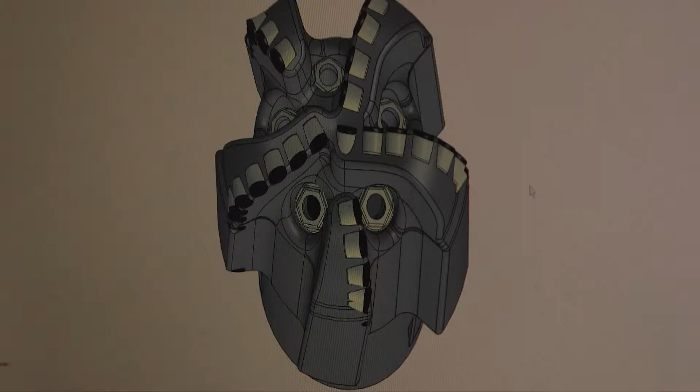For over 60 years, Taurex drill bits have been used in drilling operations all over the world. Like most products in the industry, the process starts in engineering. The bit designs are created by the engineering team with a combination of a proprietary drill bit performance software and industry-standard CAD software. Each model, whether it's a matrix bit or a steel bit, is done by our engineering group, and we can do either one at any time.

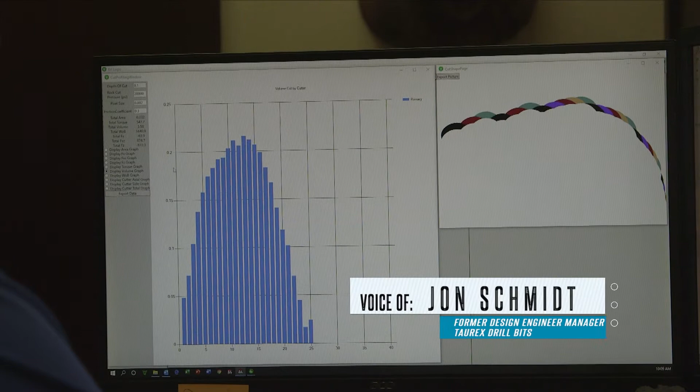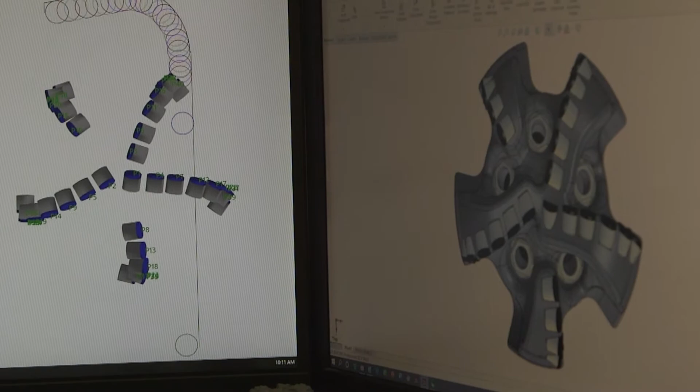These are parameters for laying our cutters out on our drill bits. We use this in coordination with our 3D CAD software to lay our bits out and lay our cutters out based on the volume of rock cut by each cutter, the cut profile of our cutters, as well as the area that each cutter cuts per revolution on a drill bit. We use this in conjunction with CAD software to create our models. And once it's completed with us in design, we send it to manufacturing.

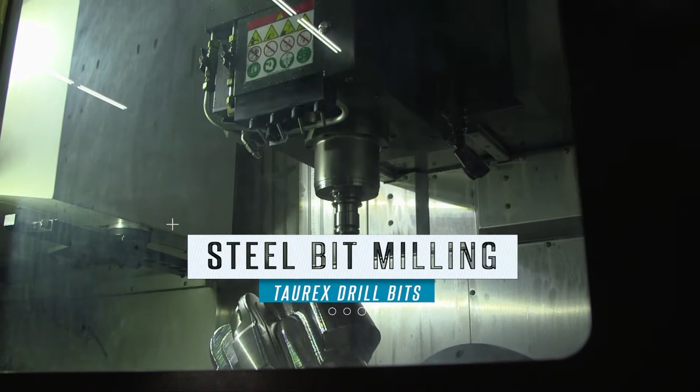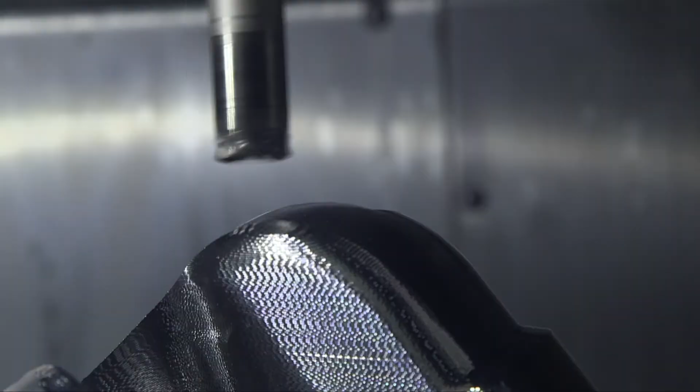We join the manufacturing process for the steel bits with the mill operation. Depending on the size of the bit, the number of blades, and all of the features that the bits will have on them, that'll take anywhere from 6 to 8 hours up to 40 hours to complete one bit. This particular bit probably will be in the machine for about 24 hours.

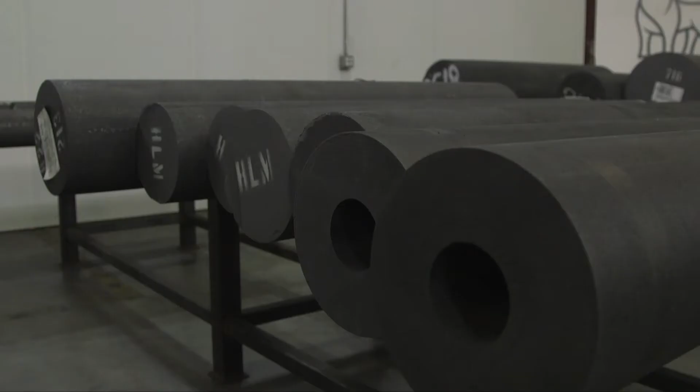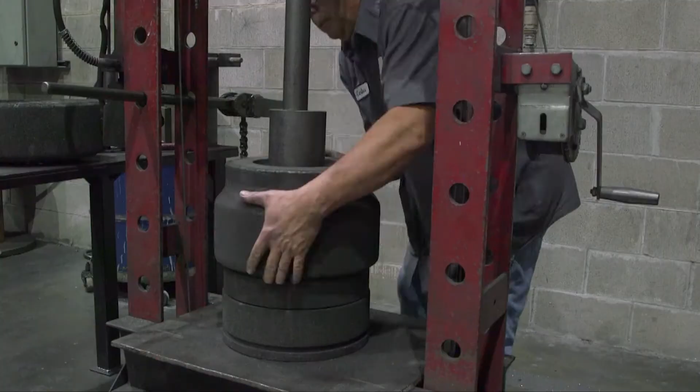While the steel bits are manufactured in the Norman, Oklahoma facility, the matrix bits begin to take shape in the Taurex facility in Conroe, Texas. Matrix bits are much harder than steel bits, so they must be cast. This process starts with the creation of a graphite mold. The raw material graphite is cut to length, then goes into the lathe in preparation for milling. In the 5-axis mill, the graphite mold almost becomes a mirror image to the steel bit in Norman.

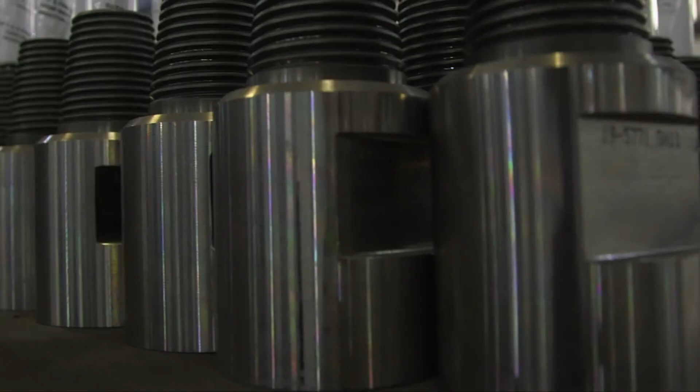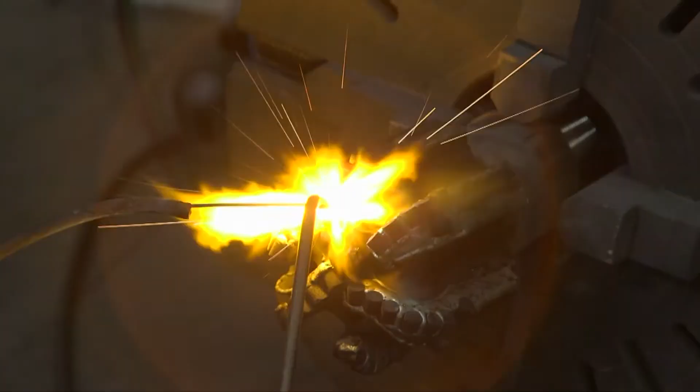Gluing the displacement plugs into the mold is the last step before forging. These plugs create the pockets for the cutters. The secret sauce for making matrix bits involves a mixture of matrix powders and binders. In the furnace, the binder is the agent that will liquefy and bind with the matrix powders to create the bit. It is imperative to keep impurities out of the casting as it cools.

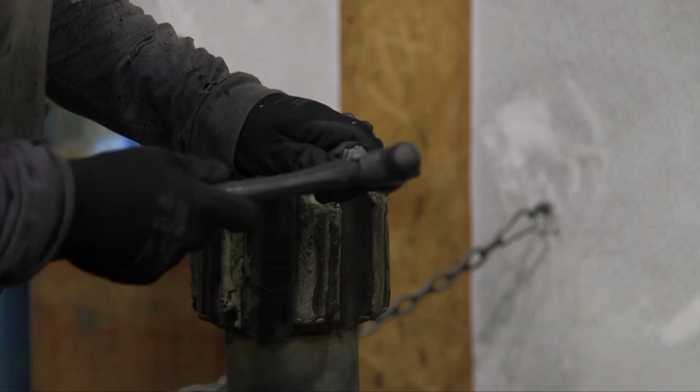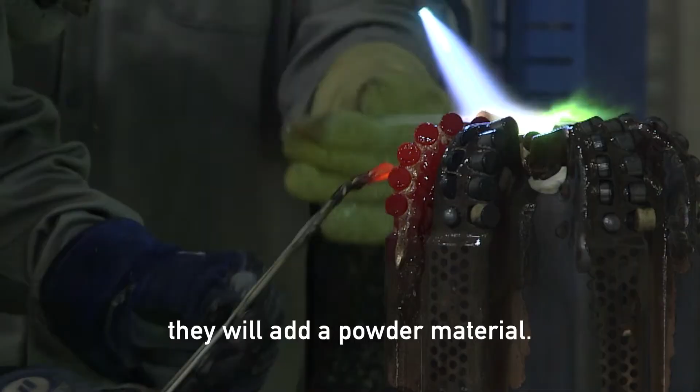Taurex has a special process that ensures a successful cool down of the bit. It takes 1.5 to 5 hours for that bit to be cool enough to break out of the mold. The big chunks of graphite get busted off fairly quickly. The detailed cleanup takes a bit more time. Meanwhile, back in Norman, the steel bit is almost done with the milling process. From here, it will be shipped to Conroe.

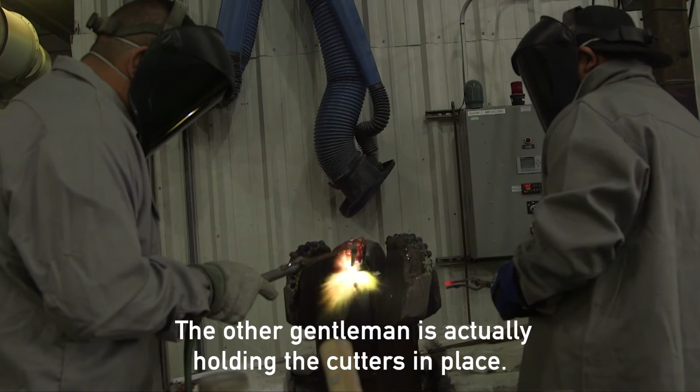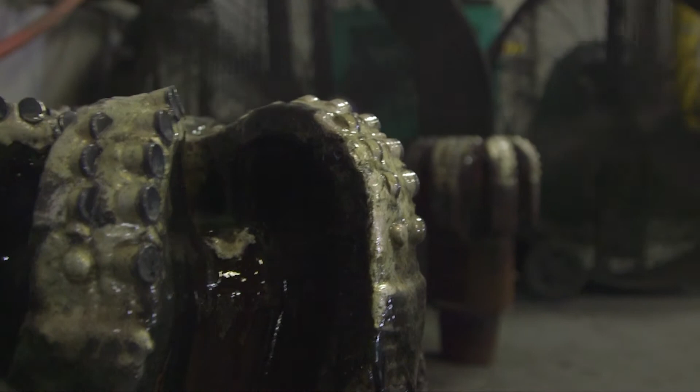Attaching the API shank for both bits is handled at the Conroe facility. The serial number for the bit is etched into the shank before it's welded to the bit. With the shank attached, all the bits are shipped back to Oklahoma for cutter installation. The steel bits get graphite plugs installed to protect the cutter pockets, then head over to the welding station for the hard surface application.

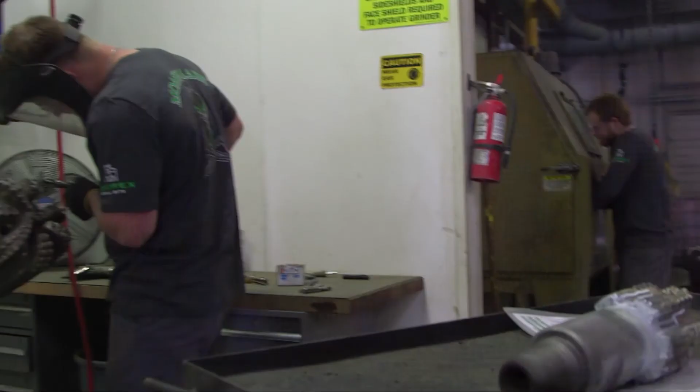When the hard surface welding is done, the graphite plugs are removed. Okay, he's knocking all the big chunks out, and then they'll take a small air tool and clean those pockets up in appropriate size. Those tools are specially designed for doing it. Both the steel and matrix bits are ready for brazing the cutters into place.

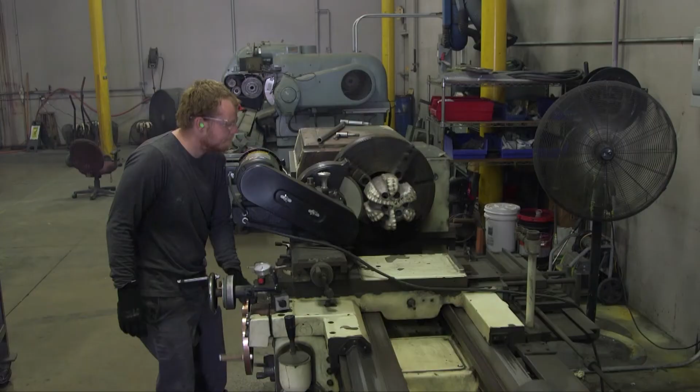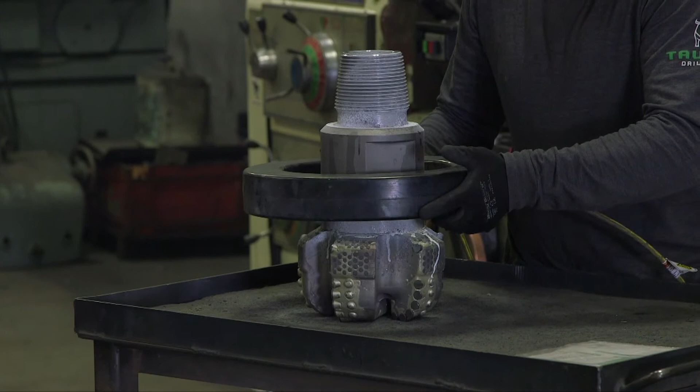The bits must be preheated before the brazing begins, so each brazing team has 2 workstations and a portable kiln. With the way our kilns are set up, this is a very efficient process because with having 2 tables with only one kiln to heat things up, while they're brazing this bit, they can have another bit sitting in the kiln getting hot, so it makes us more efficient.

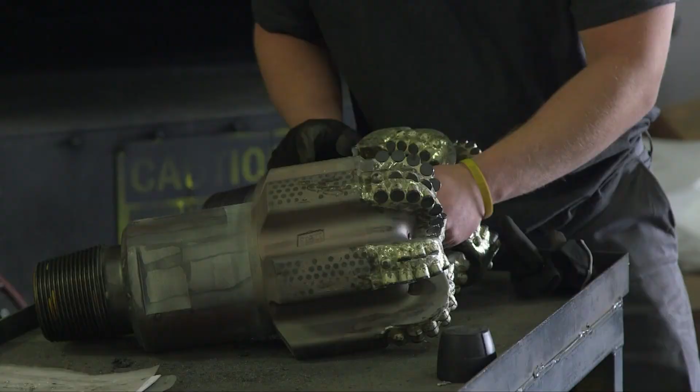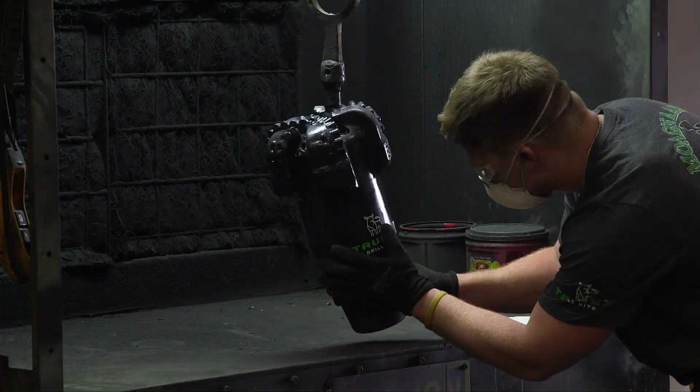They're brazing each cutter individually into the pocket using a braze material. They heat it up until it melts, and they're rotating the cutter to get the braze all the way around the cutter. Once that's completed, while they keep it hot, they will add a flux material, a little powder material you see, and that'll allow it to solidify the braze very quickly to hold the cutters in place.

And the gentleman that's holding the torch, he's doing the brazing. The other gentleman is actually holding the cutters in place and aligned correctly in the pocket. And he holds them there till they get solidified into the pockets when they're brazing. With the cutters firmly in place, brazing is completed and the bits are set aside to cool before moving on to the cleanup phase.

He's taken all that extra braze material off of the bit and off of the cutters and off of the fronts of the blades and out of there so that they're ready to be ground and finished. He has to do that for each blade around each cutter, the front down through every part of the bit. Once the bits are completed, they'll sandblast them before they do a final inspection.

The clean bit now moves across the aisle to the grinder. He's actually gauging the bit per API spec. We do that on each individual bit to make sure that the bit is within diameter and ready to go. And he will continue to do that till it passes.

Before moving on to the paint station, the bit gets a final visual inspection. Not only do they do a visual inspection, he's running his hands over those cutters. He can actually feel if there's a nick or anything in there. The paint station is the last stop for this bit before it ships out to the customer.